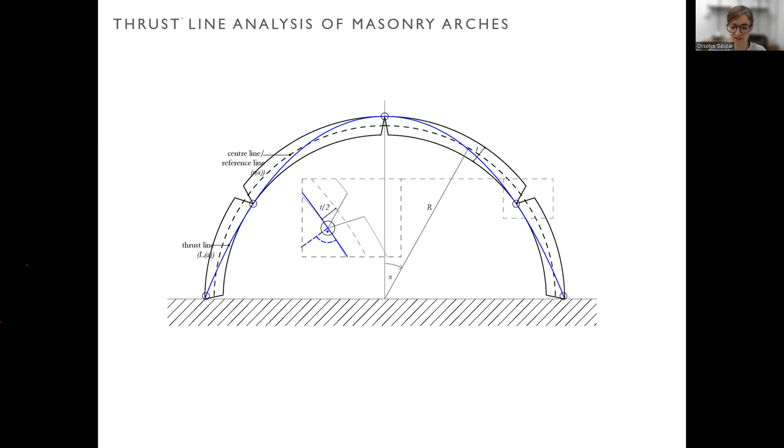But while the inverted chain has a catenary shape, we very rarely build arches in a catenary shape. It is not even necessary—the shape just has to be close enough to the catenary shape. Figuratively speaking, that means it has to contain a thrust line, like the blue line, within its boundaries. This defines how thin an arc can be, at least conceptually. The image you see here captures the limit. A thinner arc would fail instantly.

Sorry, jumped to—but a thinner arc would also use less material. Hence, finding a good shape was always important. This was also known to the master builders of the past, and it is often said that Gothic construction was especially daring, meaning those arches were very slender. I was interested in how close the builders got to the theoretical optimum.

I studied the pointed arc and determined its optimal shape, which is the shape that results in the thinnest possible arc for a given load case, in this case self-weight. And I proved that the form exists in an analytical way, which supported previous numerical studies.

Then I turned to a kind of data-driven approach, because I was interested—it's nice that we know what the optimal shape is, but how common was that in the past? So what I did is first look in the literature at what are the typical shapes of Gothic arches. There are some construction methods, and they always define an arc based on its eccentricity.

The eccentricity is basically, you see on the left, the black dots—the distance of these black dots from the center of symmetry of the arc. The bigger the eccentricity, the pointier the arc. So I collected data of various arches from English and French Gothic cathedrals, measured their eccentricity, and put them in a graph, as you can see.

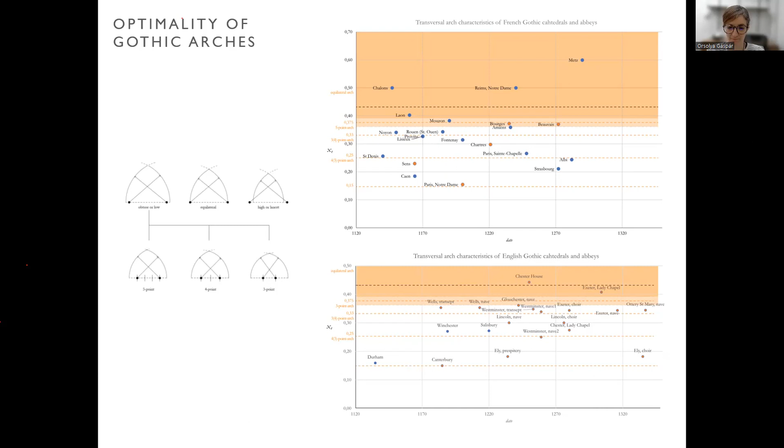Interestingly, not only the global geometry but also the shape of the voussoirs, essentially the bricks or stones that make an arc, affects how thin this arc can be. Moreover, these two features, global shape and voussoir shape, are interrelated. There have been studies on how different voussoir shapes affect the thickness of an arc, but no one looked specifically for the shape of voussoirs that would result in the thinnest possible arc.

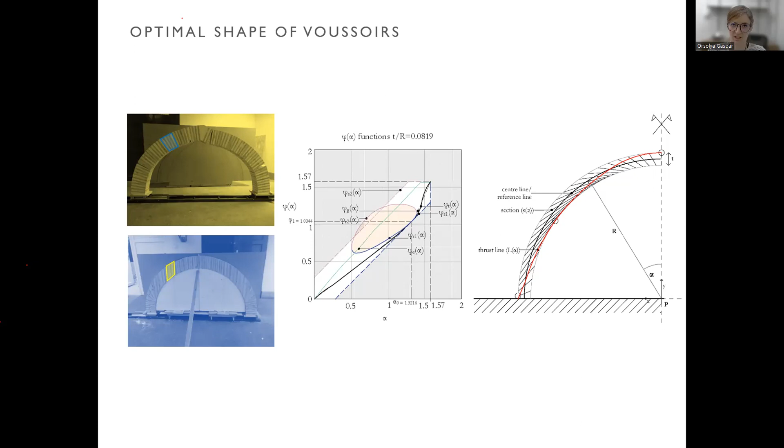So we also conducted some large-scale experiments to see how they work. And as expected, some of those experiments turned out to be rather thought experiments, because those arches do not stand. This highlights the importance of friction, which is usually not considered in thrust line analysis. But I found a way to incorporate friction in a geometrical way into the same framework I developed to find the optimal shape of voussoirs.

And again, those investigations have some interesting conclusions. One of them is that it explicitly tells us why a typical voussoir shape, which would be radial, as you can see on the top left yellow image, works almost for any arc. The reason is that for reasonable material qualities that masonry has, this shape is always above the limit of friction.

But there is another thing which is interesting. From this investigation, it turned out that for flat arches, these do not hold. It means that for flat arches, we would need to specifically design the shape of the voussoirs to avoid sliding.

And there is another thing which is not directly related to friction, but you can see from the image on the right, these curves, the red, the black, and the blue, are limiting curves of the thickness of an arc subject to their global shape. So from the left we go from a pointier one to a flatter one on the right. Observe that the highest values of these curves, meaning the biggest thickness, is almost at the same place where there is the semicircular arc.

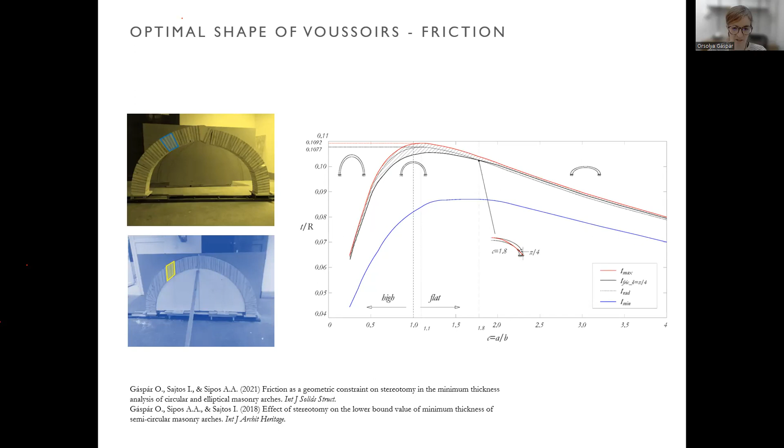So that's the background with which I arrived at the form finding lab, where the challenge is to find ways we can reduce or even eliminate the need for formwork and scaffolding. This is relevant because there are many studies on complex wall shapes, free form walls, and they usually require quite a lot of formwork.

So we studied various vernacular and historical methods. You can see a few listed on this image, from corbelling to Catalan vaulting, Nubian vaulting, cable staying, rib networks, and plate band, from which I'm focusing on the pitched brick technology.

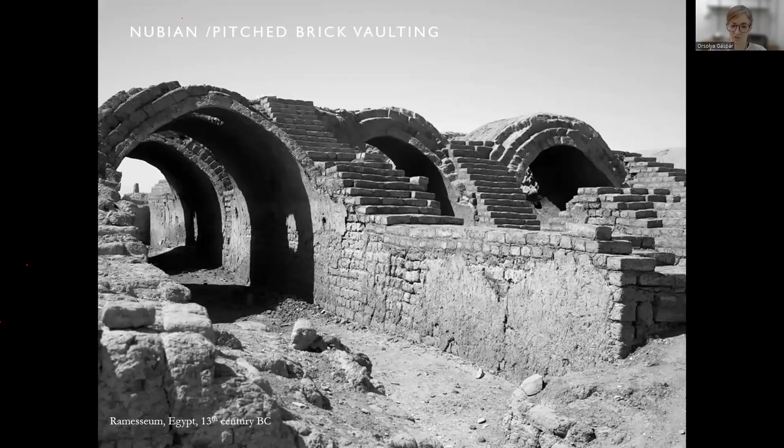This is a technique that likely originates from Egypt or the Middle East, and the previous image shows why it works without formwork. Essentially, it needs heavy back support. Usually it's a wall, and all the layers are laid a bit inclined, so they are always supported by the previous layer, which eventually lays on the wall.

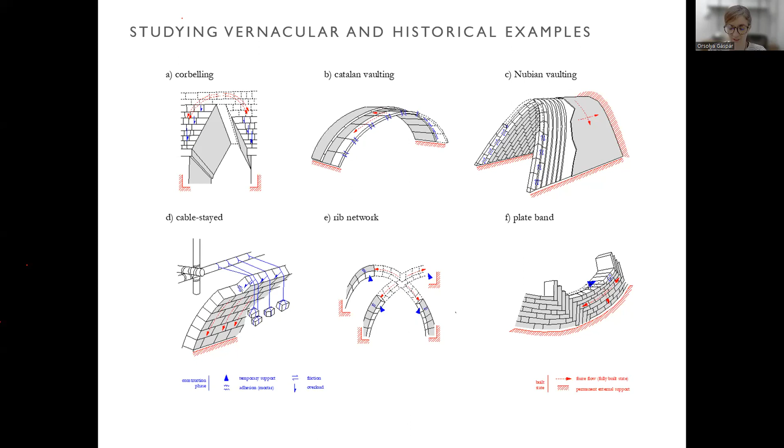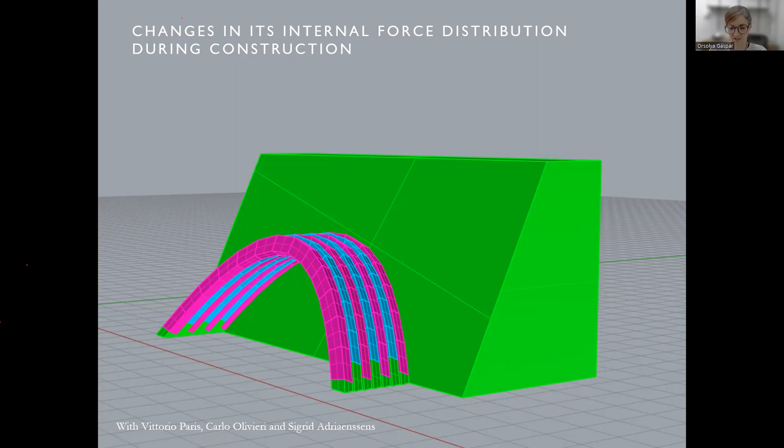Despite how ancient this technology is, we still know relatively little about how it works, especially how the forces are distributed during construction, which would be interesting if, for example, we would like to remove the wall from the end, or if we would like to find the ideal shape in terms of angle of inclination, global arc shape, etc. So this is the kind of research we are pursuing now.

Okay, and now let's start to talk about shells. And from all the shells, I will first tell you about the history of the Zeiss-Dywidag system. This was a very successful innovation in the pioneering period of reinforced concrete shells, and it had a long-lasting effect on both the technological and theoretical aspects of shell buildings.

The Zeiss-Dywidag domes were built all over Europe and even overseas before the Second World War, partly because this technology was sold along Zeiss's newly introduced projecting planetarium. The name Zeiss-Dywidag comes from two companies: Zeiss specializes in optical devices, and Dywidag is a construction company specializing in reinforced concrete construction.

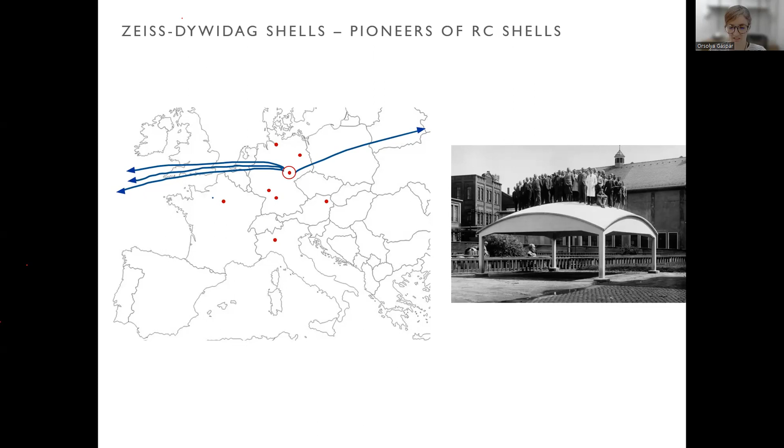The story started here in the middle with the red dot with the red circle around it, which is Jena, in Germany, and it started in 1922.

RC shells, reinforced concrete shells, are made of concrete plus reinforcement. Most commonly nowadays, formwork is laid, then reinforcement, and then concrete is poured over it. This was not obvious in the early days of shell history.

In a way, the history of reinforced concrete shells, at least in the Zeiss-Dywidag system, started out as grid shells, meaning that first, without any formwork, the self-bearing grid was constructed. This is essentially the reinforcement of a reinforced concrete shell. Then, when the grid was already made, they laid light formwork, and on that light formwork they sprayed the concrete.

This was true for the first two stages of development of the Zeiss-Dywidag system, and then they changed the whole way of construction and started to build shells as we do reinforced concrete construction today: making formwork first, then laying the reinforcement, then pouring concrete over it.

It was rather easy to explain why this last step was taken. There are two main reasons. One, the second method, the non-bearing grid, requires less precision. And the concrete layering can be a bit thinner, which, if we think about it with what we know about concrete construction today, is a bit absurd, because the thickness they were thinking about is really 3 centimeters versus 4 centimeters, which is extremely low for concrete construction. But back in the early days of shell construction, it was not unusual.

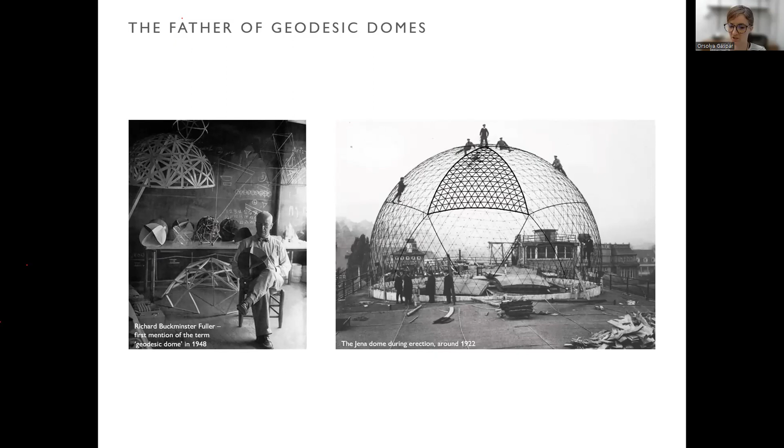If you know the term geodesic dome, most likely you associate it with Buckminster Fuller, who was a very famous innovator in the mid-century United States. He was the one who coined this term, actually, but he coined it in 1948, which is more than 25 years later than when the first dome was actually constructed. We do not have any information that he had any previous knowledge of this dome, so likely these two things happened completely independently from each other.

The interesting thing about the first geodesic dome is that the challenging thing was that there was not much info on this early example. It was rediscovered in the 1980s, and then various assumptions were made retrospectively about how it was constructed.

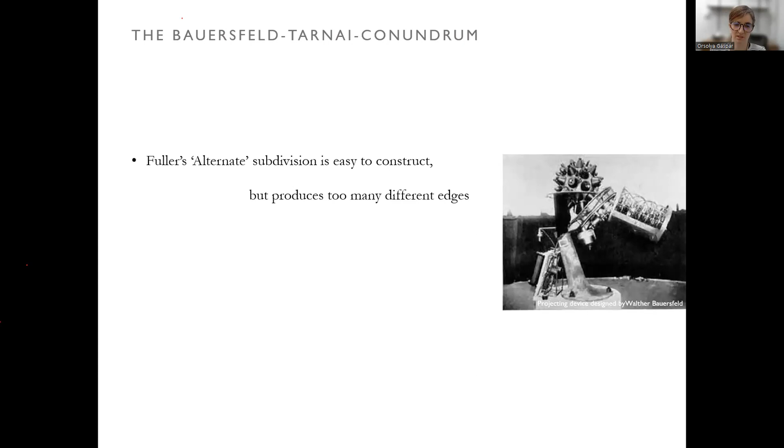A very popular belief was that the pattern of this dome was the same as the pattern of Fuller's alternate subdivision, which seems logical, as that is a very easy to construct pattern. But there were other researchers who know the work of Bauersfeld as an optical engineer, and as an optical engineer, he was very keen on optimization. The idea was that someone who went so far in optimization in optical devices would probably not settle for something that is easy to construct, but in a geometrical sense, as I will show you, performs rather poorly. This idea that the design must have been different than Fuller's comes from Professor Tibor Tarnai.

A brief outlook on what Bauersfeld did as an optical engineer. He was the inventor of the planetarium device, this thing you can see on the right.

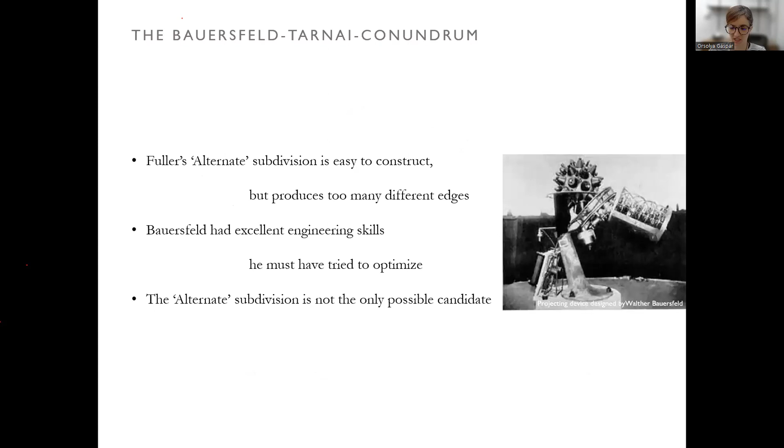He turned to building the dome because he needed a surface that was flat and uniform enough to try his projecting device. The projecting device also relies on a geodesic concept: the projectors are inserted on the surface of a truncated icosahedron, and he made sure each surface would fit the same inscribed circle.

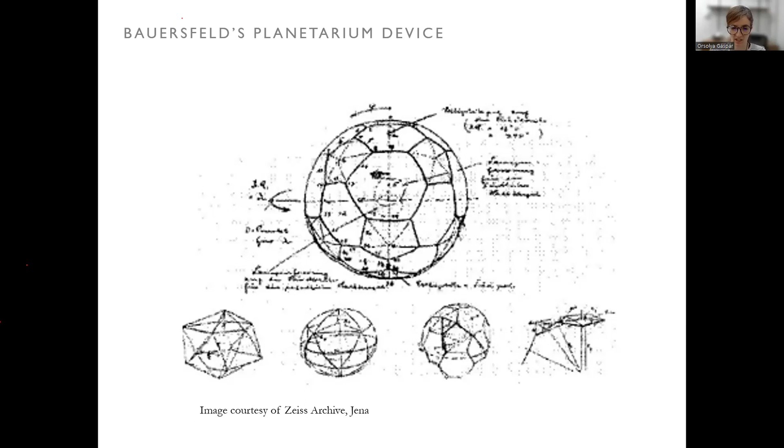So now we know why he designed the dome. We have also seen a couple of geodesic domes or geodesic patterns, but there are some characteristics that are important, and I will use these terms a lot in the upcoming slides, so let's clarify them.

First, a geodesic dome is usually created by having a regular polyhedron, typically an icosahedron, inscribed in a sphere and then projected onto the sphere. The subdivision of its faces either follows on the sphere, or is done on the plane and then the subdivided pattern is projected onto the surface. I will show examples for both methods.

It's again not something set in stone, but typically each curve on a geodesic dome lies on a great circle. A great circle on a sphere is a circle that has the same radius as the sphere. In contrast, there are small circles, like the latitudes on Earth, which have a smaller radius than the sphere itself.

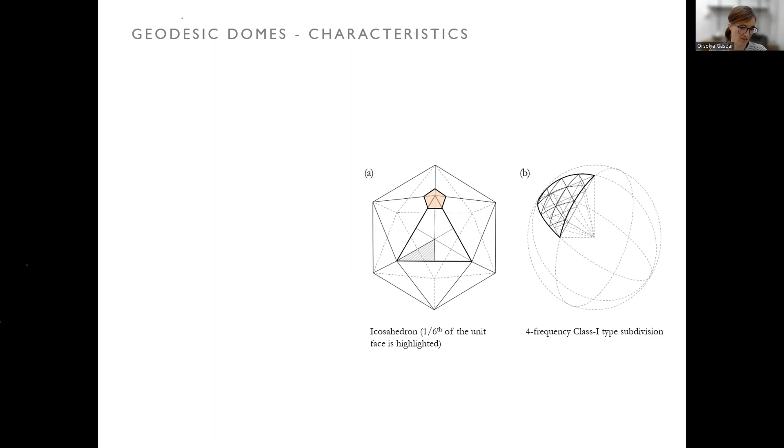There is also a classification of these patterns. What you see in this image is a class 1 type subdivision. I will shortly show you the other classes. Based on the terminology I've introduced, we can see from the very few images that survived of the first geodesic dome that it was also based on an icosahedron. It is a 16 frequency subdivision, and it is class 1 type.

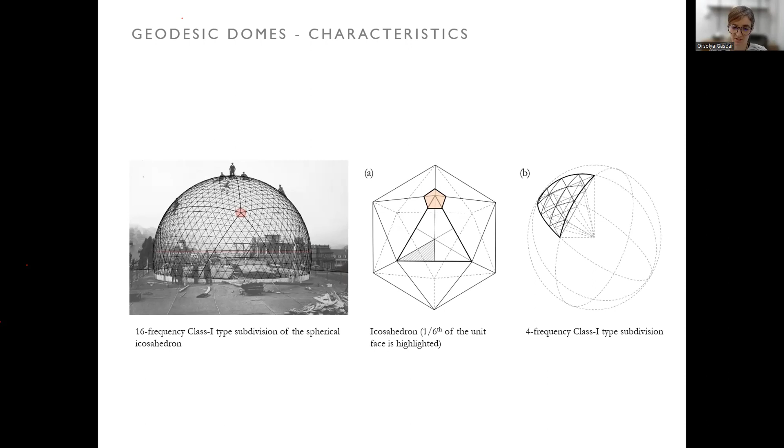What are the other classes? There is class 2 and class 3. The classification tells us if the pattern of the small triangles is rotated compared to the orientation of the original triangle, which is the face of the icosahedron. In class 1 type, it is not rotated, it has the same orientation.

Okay, so that's the way to construct a geodesic dome. But what defines a good geodesic dome? There is an aesthetic aspect: it needs to be smooth, which can be achieved with almost equilateral triangles. There are also construction and assembly aspects, which need as few different edges as possible for easier production.

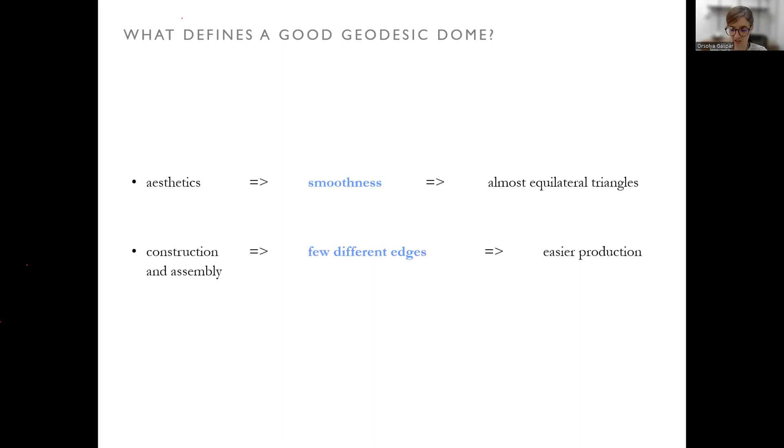Why is it so hard? Usually these two aspects are conflicting, meaning you can go for a very smooth pattern, but then you'll have a greater variation of edge lengths, or you can have very few edges, but then the pattern will not be so smooth.

There are, of course, not only regular solids like the platonic solids, but so-called semi-regular solids that share some properties of the regular solids but are more varied. One of them is the Archimedean solids, where the edge length is consistent, but there are multiple types of faces, always more than one. The dual of these solids, of which there are only 13, are the so-called Catalan solids, which have congruent faces, only one type of face, but then the edge lengths are varying.

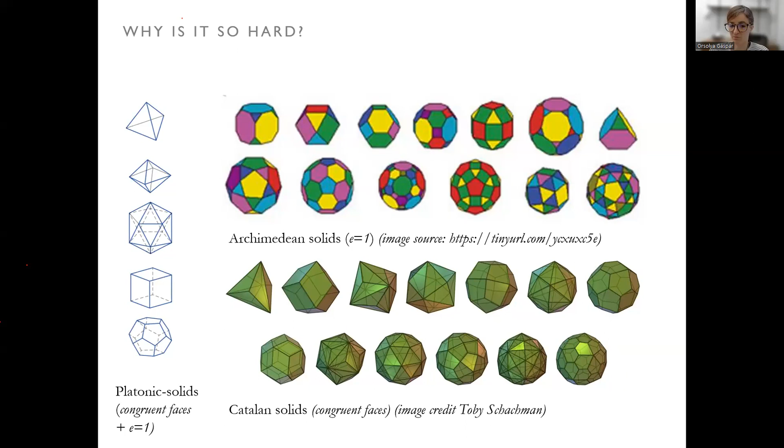So I think this is insightful as to why it's such a hard challenge to find a geodesic pattern that simultaneously fulfills both aspects of an ideal geodesic dome.

Let's see how Bauersfeld attempted to do this. First, he introduced a benchmarking parameter for smoothness, which he called the edge length ratio. This is the ratio of the longest versus the shortest edge.

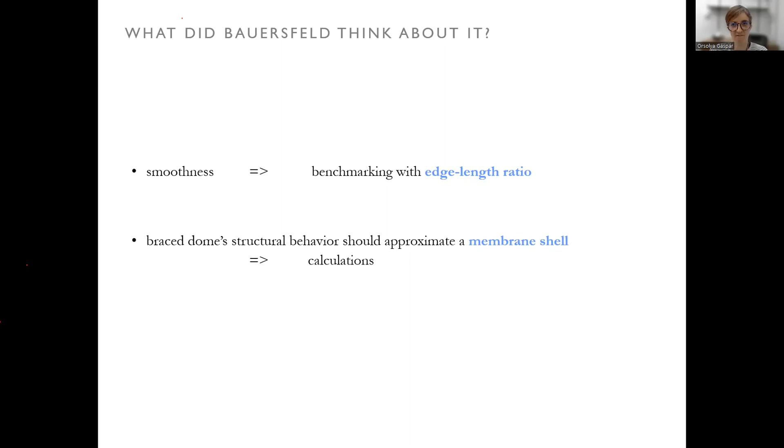He also aimed to have the braced dome's structural behavior approximated by a membrane shell, a continuous model for calculation purposes. For that, he wanted to have as regular triangles as possible. What these two added up in his mind was an equal area tessellation.

In his manuscript, which is the main resource for this research, there are three main benchmarking parameters he continuously used. One is the already mentioned edge length ratio, the ratio of the longest and shortest edge. Another is the number of different edges, which controls how many different edges are in the tessellation. And the so-called edge density, which is the perimeter, or half perimeter, of the triangle over the area.

While the first two benchmarking parameters are global parameters—so there is one number for the whole tessellation—edge density is actually local. I will talk about edge density only towards the end of this part of the talk, but it will be interesting to see how he used it.

One of the most exciting outcomes of this research was that we could prove that Bauersfeld was very much into optimization. As I mentioned, there were very few resources on his work. The reason for this was that there were only a couple of images that survived from this first geodesic dome.

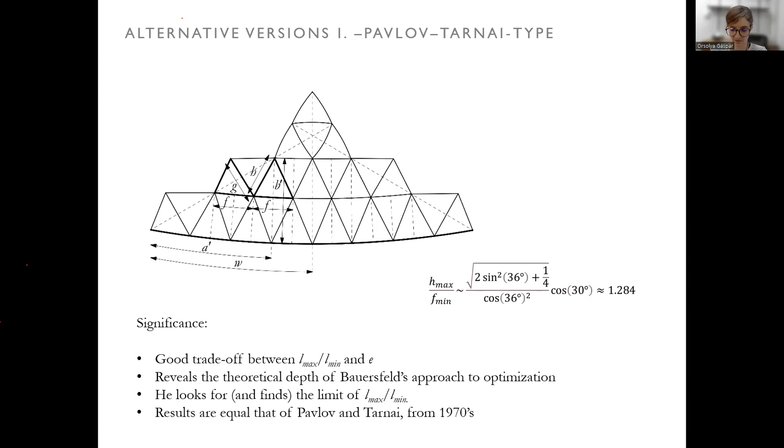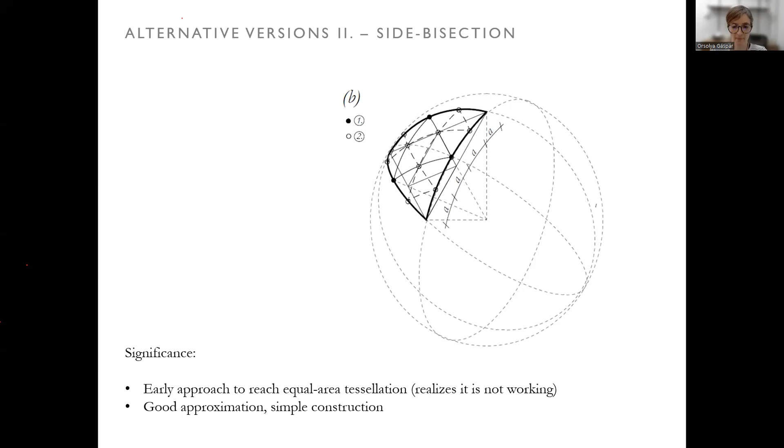Bauersfeld actually attempted to reach an equal area tessellation with this method, but he was not happy with the result, although it's not very far from an equal area tessellation. It also has relatively few edges - debatable, but not that many at least - and it has a very good edge length ratio. But neither was the one that he was actually settling on.

I considered myself super lucky when going through this manuscript, as an insert kind of fell out. In that insert, I find a very detailed calculation of a pattern that at first I had no idea what it was, but it seemed very promising. It also contained a lot of calculations. And while I already told you that Bauersfeld's aim was to find an equal area tessellation, this was not obvious at first. No one told me that it was so.

So when I saw the calculations, I had no idea what I was seeing. But after a while, it became obvious by re-engineering the calculations that he was actually developing an algorithm that would lead to an equal area tessellation of the geodesic surface. It is not, again, a perfect match, so it will not result in equal area triangles 100%, but it is a very good algorithm to almost get there.

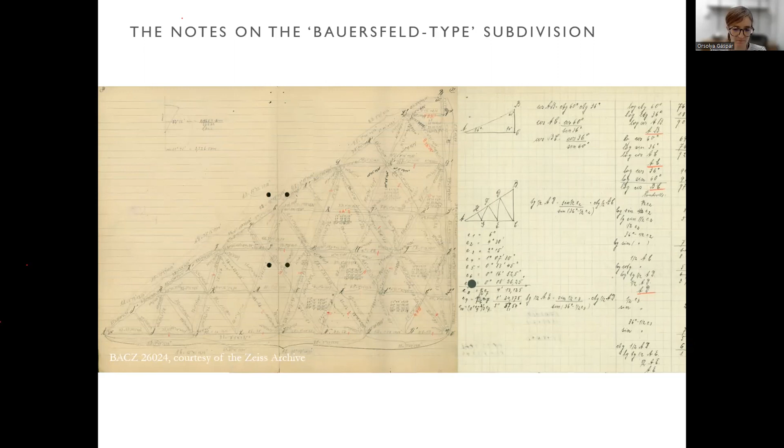The algorithm works as follows. Again, what you see on the image is not 1/3, but 1/6 of the face of the icosahedron. Remember that the face of the icosahedron is a regular triangle, so 1/6 of it actually represents the whole triangle because of its symmetries. First, he divides this triangle in the area ratio 1:3, and then with every subsequent step, he halves the area. These steps are marked in black here.

This was a very interesting result. It could be understood, as I said, by the calculation. He used the so-called L'Huilier formula to calculate the area of a spherical triangle, which is calculated as the spherical excess. It means that the internal angles of a spherical triangle do not add up to 180 degrees - they are always more - and how much more actually means the area of these triangles.

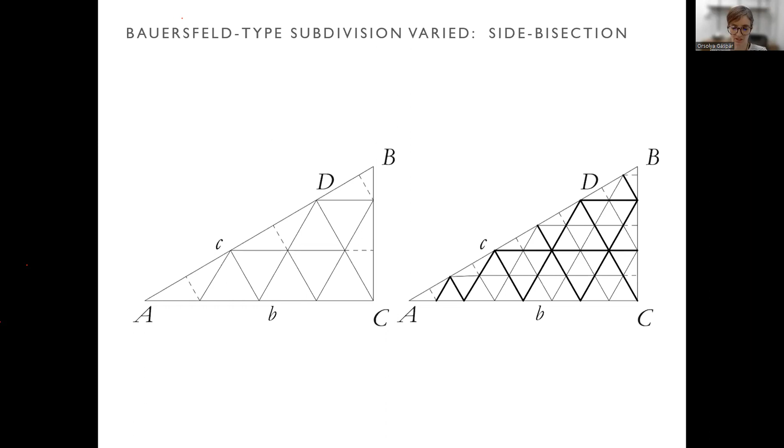If we would use a computational approach, and if we could get the triangles to be close to equal area within 1%, that is already considered a very good result.

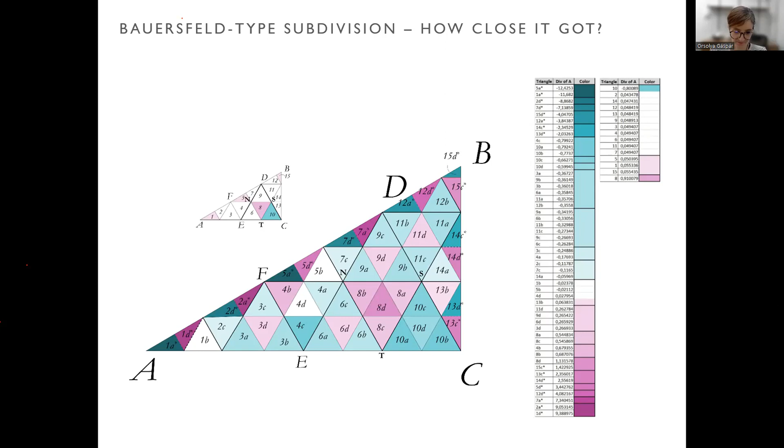Okay, so let's compare and contrast. The Bauersfeld type subdivision is the equal area subdivision, as I have shown you, with the last step having side-bisection, and not the method that he originally started to use.

We also calculated the geometrical data for an unmodified logic, so if he were to continue with the same algorithm. As a comparison, we included the side-bisection and Fuller's icosahedral subdivision, because that was originally assumed for this subdivision.

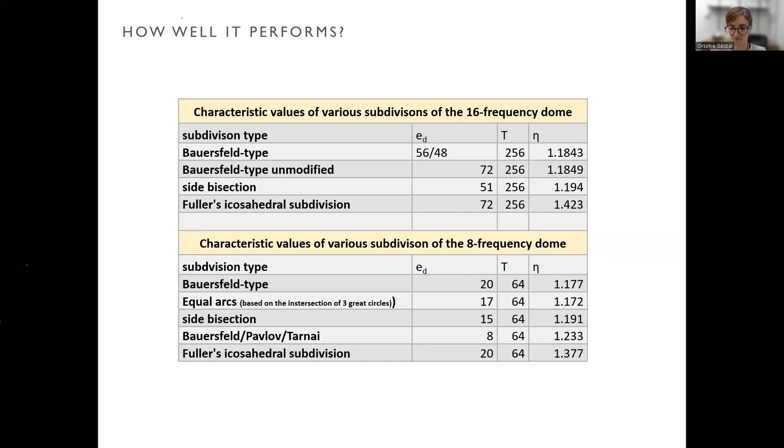The only problem was that it was a fantastic result. I was super excited, but there was no indication on the documents that this was actually the one that was built. So we did virtual reconstruction of various patterns and then compared it to the existing photographs to have another proof of concept and try to support whether it could have been built like that or not.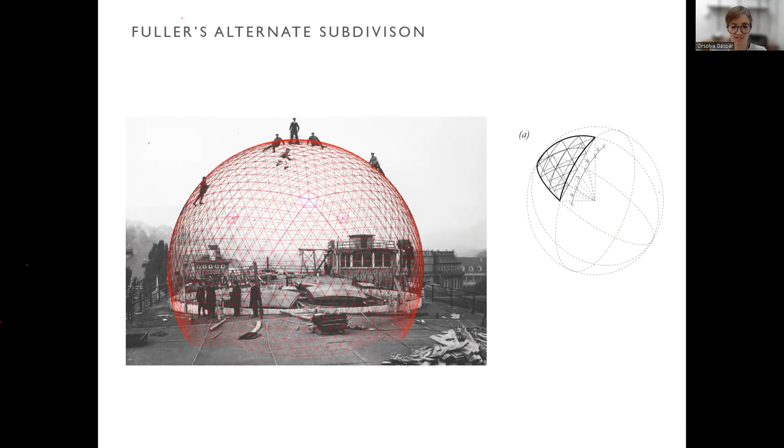So let's see how various subdivisions perform. This is Fuller's alternate, so the one that was thought it was. As you can see, it is not a particularly good match. Side bisection is already more promising, so the red overlay is almost matching the one underneath.

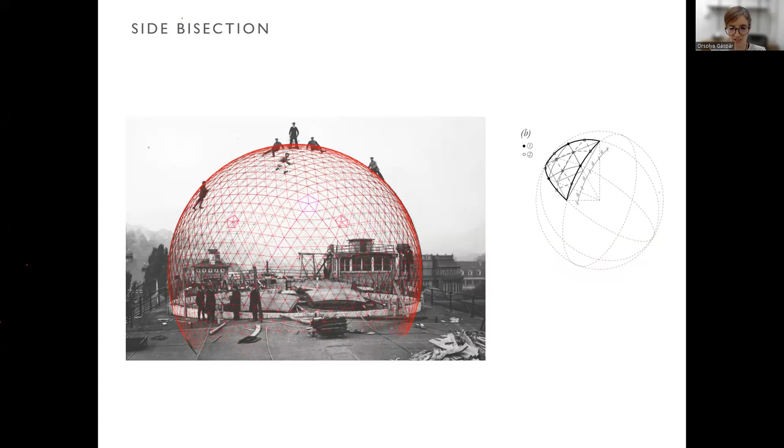And this is Bauersfeld's, the one that I call Bauersfeld type subdivision, and I think with some reason, because this by far matches the historical images the best.

Okay, so I spent the previous part of the presentation to convince you that this geodesic pattern is awesome, and it really is - in geometrical terms, it performs very well. So it was super interesting to see that after this, only this first dome was constructed, the method was left.

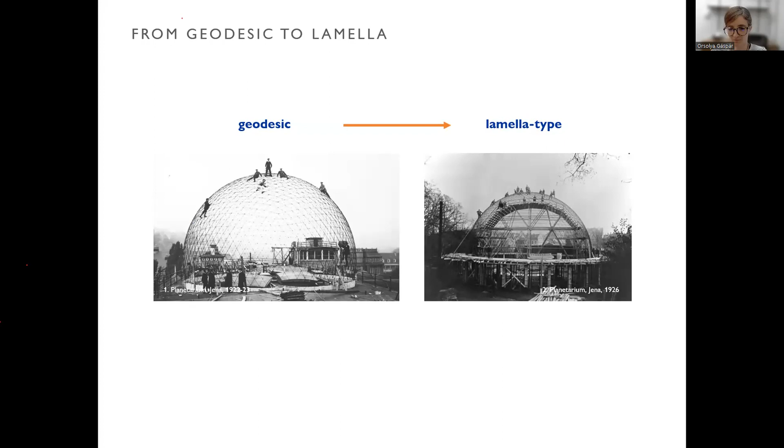For the tessellation, another kind of pattern was chosen, the so-called Lamella type dome. The difference between the two is that the geodesic is based on a regular polyhedron, which is projected onto the surface, whereas a Lamella type dome essentially uses small circles as latitudes on Earth, and then isosceles triangles are constructed within these small circles when the pattern is finalized.

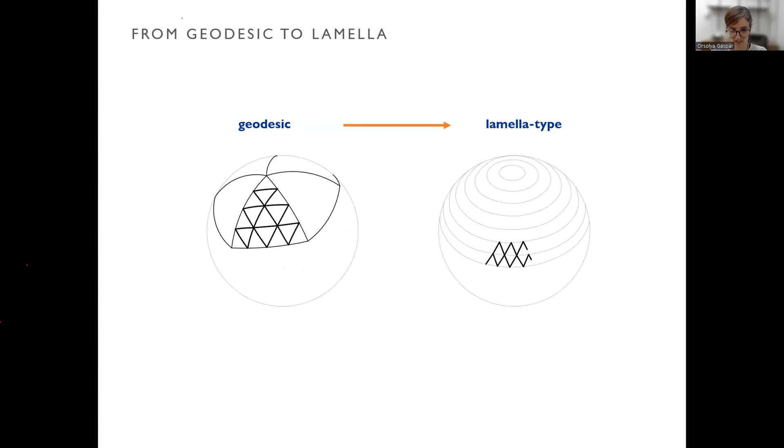What could have been the reasons for this change? One reason was that the later domes were significantly larger than the original dome, which was only built for demonstrative purposes. The original dome was 16 meters in span. The second dome that they built was actually 40 meters in span.

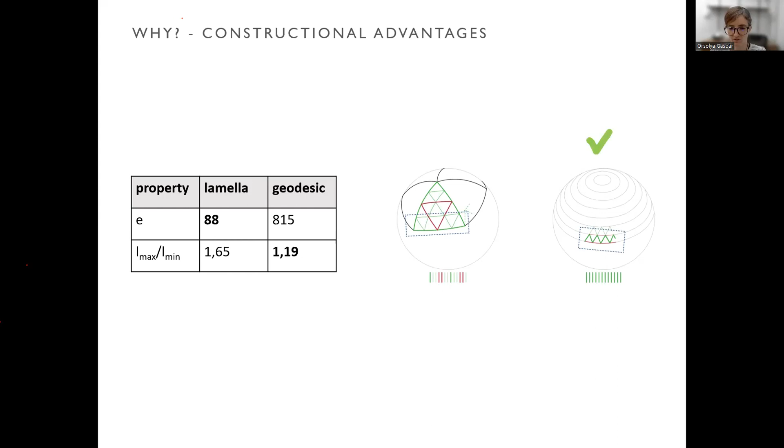So that's one reason, because a bigger dome requires a different construction technology. The original dome was constructed from top to bottom with the help of a crane. The later domes were not surprisingly constructed from bottom to top without the use of a crane because of their size.

So that could be one reason, but there is one that is more important, I think. If you look at these images, what they try to show you is the patterning as you would lay them if you were on the work site. For a geodesic dome, you will have to vary at least 1, 2, 3 or more types of edges in one row. Whereas for a Lamella type, you would use the exact same type of element in one row, and you don't have to think which one comes next.

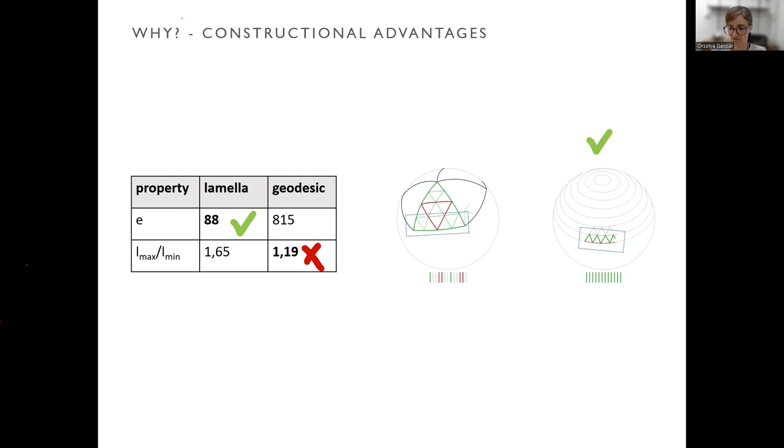That's one thing. Then there are other properties. Of course, there is the edge length ratio, but from constructional purposes, it is really irrelevant. But the different number of different edges, which is marked with E, is important. For a Lamella type of dome, for the size of the later domes, approximately 40 meters, there are 88 different edges. In a geodesic pattern of the same size, there would be 800, so a lot more different edges, which from a constructional point is not good.

However, the geometry of the geodesic pattern is really nice. The question is if the Lamella type could match it. First, we learned that the Lamella type was also based on the idea of trying to create equal areas. So we checked how far Bauersfeld got with that.

He wanted to have relatively regular triangles because he wanted to calculate the behavior of the shell based on a continuum model. And for that, he would need regular triangles, to have a good match between the two models, discrete and continuous.

And again, he used some benchmarking parameters. In this case, he used, to some extent, edge-length ratio, not so much. Rather, he resorted to the number of different edges and the edge density. Again, that's a local parameter and is the ratio of the half perimeter over the area.

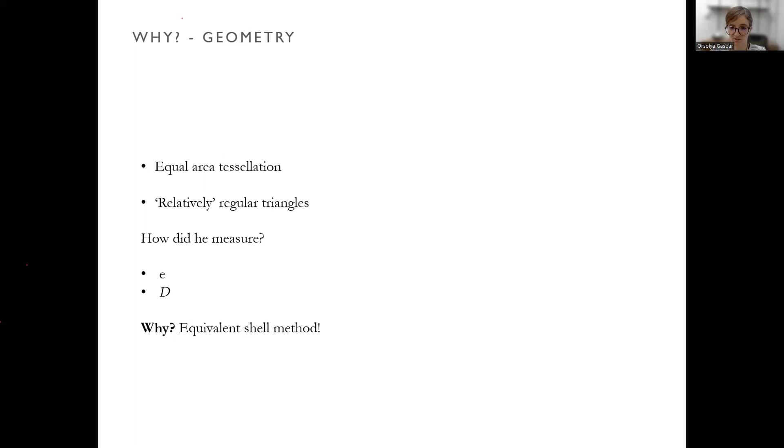I told you that he wanted to calculate the behavior of the shell using a continuum method, and it has a name. It's called the equivalent shell method. The concept is, as Bauersfeld used it, what would be the equivalent continuum of a regular grid of bars, that is, a triangulated grid made of regular triangles. So what would be the equivalent continuum that would have the same deformations? His model was a planar one, so he imagined two planes loaded in their own plane.

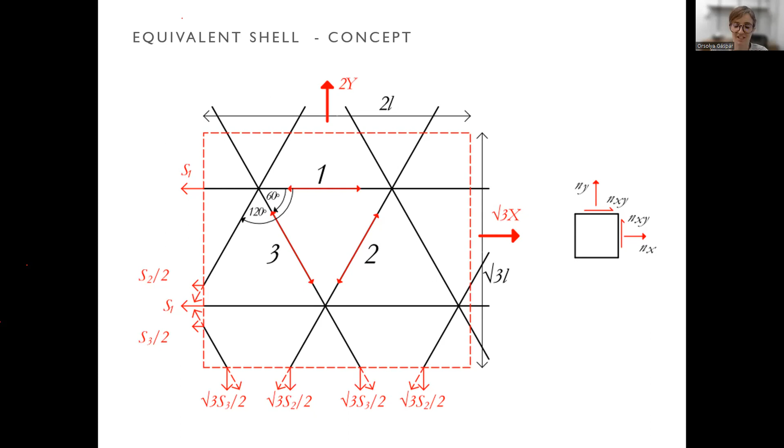And what would be the properties of these two that would result in similar behavior? Why was it used? The calculation of bar forces is actually possible in a triangulated grid using the equivalent continuum as a base, based on statics essentially. So for that, you would not need to worry about the deformations because the problem is statically determinate.

But the deformations are relevant if you want to use it for buckling analysis. And actually, this is what Bauersfeld intended to use. He wanted to use the continuum method to check if the shell were prone to buckling. The grid shell was prone to buckling. And for that, he needed the assumption of equal deformations. Not only the assumption, he needed to make sure that the deformations were actually equal.

The equivalent shell method or model has a rich literature. It started in the 19th century with a very basic model. I will shortly talk about it. But there was an inverse problem that was investigated around the time of Bauersfeld, called the truss framework method. This was an approach to calculate stresses and strains in a continuum based on the discretization of this problem. This was essentially an early numerical approach.

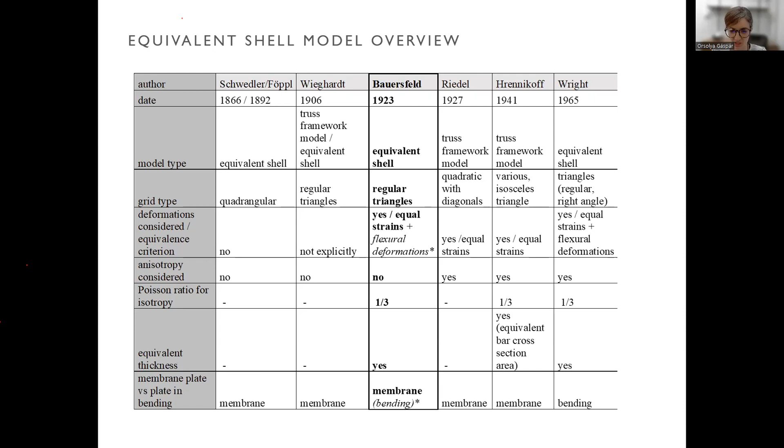The equivalent shell theory, as Bauersfeld used it, so using a continuum to calculate buckling or bar forces in a grid shell, became heavily researched in the 1950s. There is a seminal paper from Wright, but that was in 1965, and in terms of content it's comparable to what Bauersfeld discovered in 1923. Again, he was a mechanical engineer in an optical firm. This was a side project for him, but his contribution was only matched about 40 years later, which is, I think, kind of exciting.

The first dome that he designed with this lamella pattern is the so-called Schott dome. It is also in Jena, where the first dome was built. This is not a coincidence. The headquarters of the Zeiss company is in Jena, and Schott is the neighboring company, and the two companies collaborated a lot. For this company, he designed a large dome with 40 meters span, using a lamella type of tessellation.

The lamella type of tessellation has a unique challenge: normally, as you approach from the border to the middle, the triangles become more and more distorted because there is less and less space. What Bauersfeld did is develop a scheme to reduce the number of triangles subsequently from the edge of the sphere to the middle of it.

This was again re-engineered from his original drawings that you could see in the last image. From the calculations, we could determine what kind of constraints he used in terms of the shape of the triangles, so what were the limits he allowed in terms of distortion within the same range.

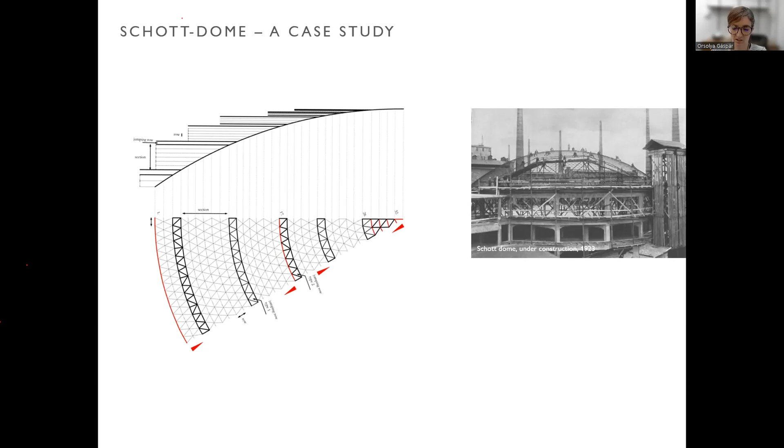But how close? First we will focus on the global parameters - kind of what were the ratios of the largest and smallest area, edge length ratios, number of triangles, and so on. And then I will talk a little bit about local parameters.

What are the subdivisions, the tessellation types compared here? There are geodesic patterns and lamella type patterns. The geodesic patterns here are made up - he never made a design for a geodesic pattern of this size, but we tried to fit one as close as possible, with the logic of having the same amount of triangles around the edge of the sphere. For the lamella type, there are two: one based on this equal height concept I briefly introduced before, and the second one based on equal internal angle, which is something you would do, I think, if tasked to design a dome - it seems logical to have each row have the same internal angle.

Let's see first how the ratio of the largest and smallest area works in different patterns. For his design for the lamella dome, the ratio is 1.6. For geodesic patterns, we tried two: one based on the full area design and one based on the side bisection design. One performs significantly better - side bisection results in a much more even distribution of triangle areas, but the full area design is way worse. Interestingly, the simpler lamella design to construct, the one with equal internal angles, has actually a pretty similar ratio in terms of maximum and minimal areas.

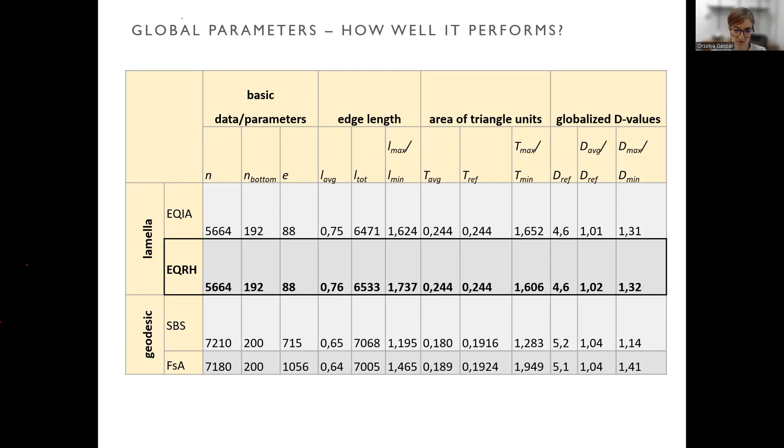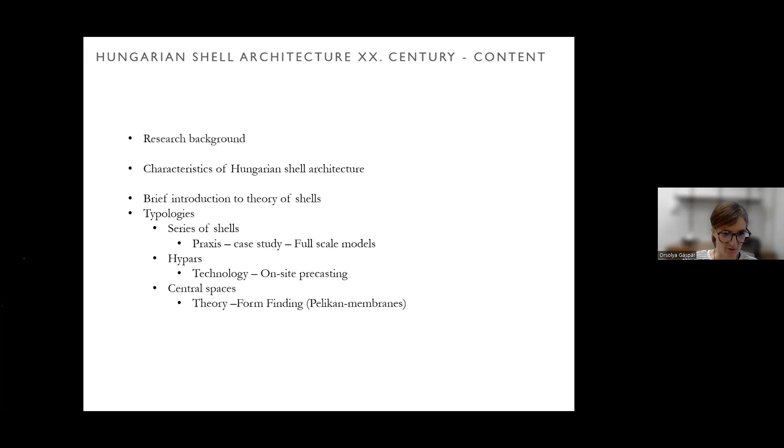Before all of that, I will give you a short glimpse into the background of this research.

So the developments of Hungarian shell architecture are interesting from the point of view of knowledge transfer, because despite the name of the Iron Curtain, knowledge transfer was possible and was practiced through the curtain as well, in both directions. Of course, not with the same intensity, but it still did happen.

When we started this research, the aim was to document Hungarian shells, because they are a huge part of our heritage of industrial construction, but they are also a huge amount of concrete. That's important because if these structures, which are reaching the end of their life cycle, are demolished, they will create a large amount of rubble. And they are very likely to be demolished unless public awareness of their value becomes the norm.

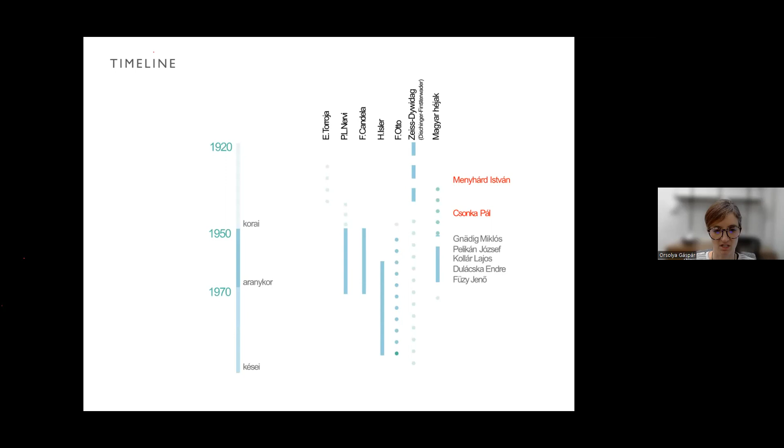And this is a structure that was actually built by Nervi. The buildings are put here based on when they were constructed. And if we now look at the timeline filled with Hungarian examples, you can see a very big empty space here. This is the period after World War II when shells were not built in Hungary.

crown jewel of pre-World War Hungarian shell architecture, but it was never completed. The scaffolding was already there, the formwork was already done, but then the war came, and actually the scaffolding and the formwork were all used for other construction purposes and also to some extent for heating during the war. And it is still in this state today. So it was kind of never finished. In a way, it kind of reflects the story of Hungarian shell architecture in one particular example.

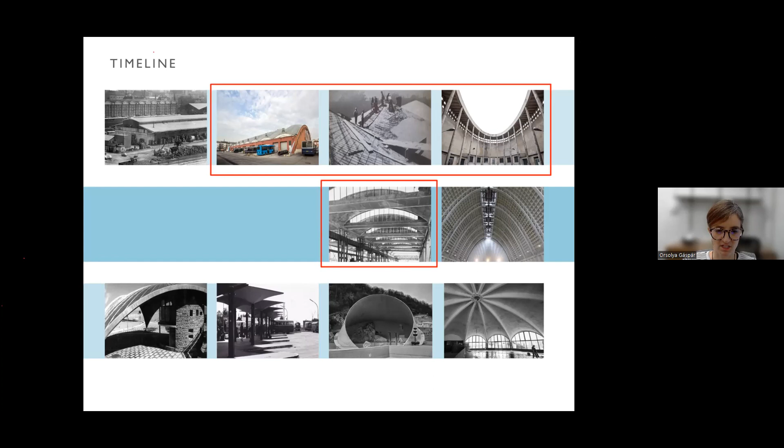Okay, with the red, I highlighted some structures that were designed by the same person. This is István Menyhárd. The name is not very important, but it is important that also in Hungary, there was one figure who was very influential and who had a long-lasting effect on shell design. This was very typical in the pioneering period of shells, not only in Hungary, but also in other parts of the world.

I promised a short intro to shells. I just want to classify structural models and geometry very briefly. For structural models, when we talk about shells, and these are continuous shells, we usually differentiate between three different types, from the very specific to the more general.

We have shear-free membrane on the top. As you can see from the arrows, shear-free membrane is a membrane that only has normal forces in it, or normal stresses, so no in-plane shear either. This is a very unique state. It's not very typical. Where you can kind of experience it in real life is more in tensile structures. They are typically modeled as shear-free membranes. But it can also be applied to reinforced concrete shells if the form is defined accordingly.

Then there are membrane shells, which means we have normal forces and also in-plane shear forces. And the most general case is shells in bending, when we have normal stresses, shear stresses, and also bending moments.

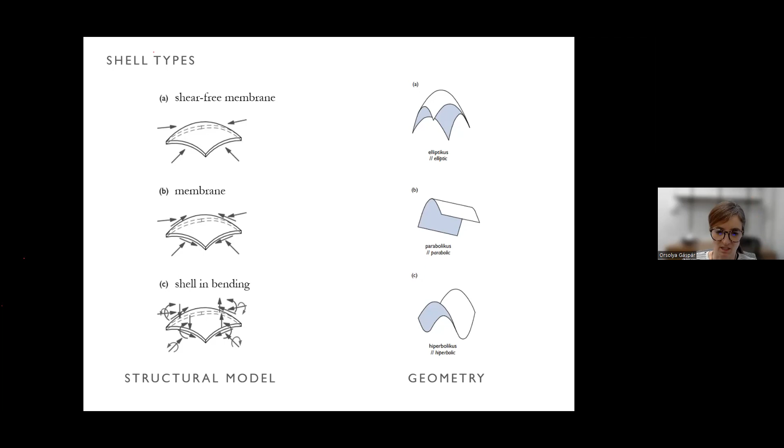Okay, so now we will see some examples. First, some examples when there was a big roof structure made up of a series of shells.

The first example is from the pre-war era, from the designer I mentioned, István Menyhárd. This is the bus garage. It's a typical application of shells, a building for infrastructure, which requires much bigger spans than were used before. This structure is exciting because it has a 90-meter span in the lateral direction.

The shells are elliptic - I mean each slice is elliptic. This 90-meter span was quite large. It was spanned with a 6-centimeter thick shell, which is extremely light. This was the biggest span built at that time anywhere in the world with this kind of structure.

It was only paralleled in 1952 by the Marignane hangars, which were designed by Nicolas Esquillan and Auguste Perret.

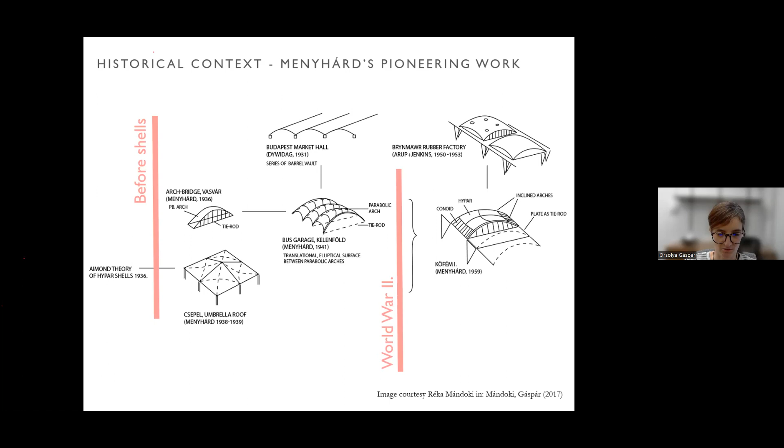This is the structure built in 1957, the first ever after World War II. The construction technology is very inventive - it relies on a sliding formwork, and for sliding the framework they used overhead cranes that were actually later used in the factory. So they kind of exploited a technology that was already there to make the formwork as efficient as possible.

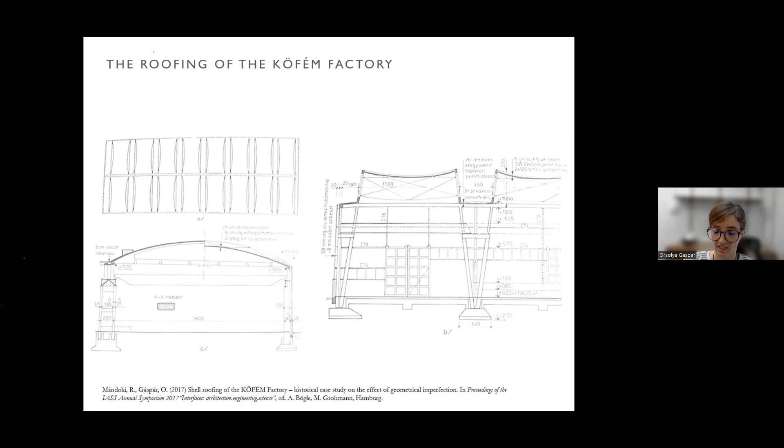The shape of this roof is very interesting. It is a saddle shape. As you can see, between two girders, there are these saddles. And these saddles on the sides, on the shorter sides, are connected to conoids, because along the edges they wanted a horizontal line to finish the design and did not want to see the edge of the saddle. But this is a challenge, because normally you would have to support a saddle shell with edge beams all over the perimeter.

A typical saddle would also exert normal stresses in all directions. But if you choose the dimensions of the shell right—for example, the ratio of the longer to the shorter side is 1 to 2, as was the case here—then for certain load cases, and the design load case here was a uniform vertical distributed load, as you can see from this image, the shell could be supported by edge girders along the long edges.

It would only have normal stresses exit on the short edges. So only these normal stresses would load the conoids adjoining them, and that's actually a load case that the conoid is very happy with. So this was a very creative concept on how to solve an architectural problem, but also how to make it suitable for a very specific shell geometry. This was such a success in terms of efficiency that it generated a large number of shells for industrial application, all related to this original concept.

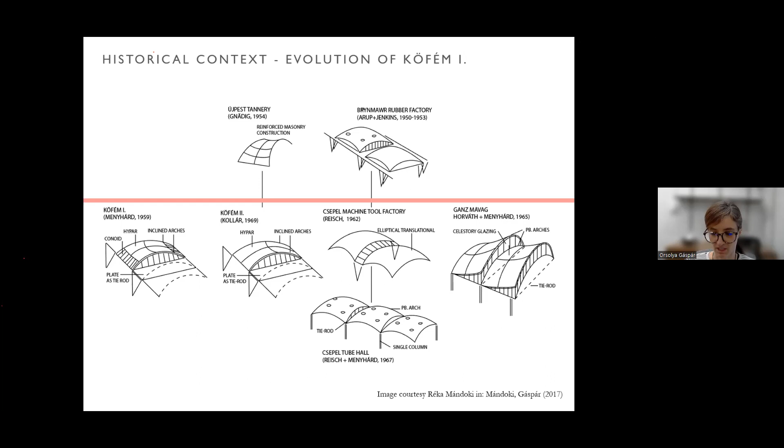This is an early successor of the saddle shape. This is also a saddle. They tried to combine it with some skylights in a unique way. This is one example of the same concept—same constructional concept—but with an elliptical shell design.

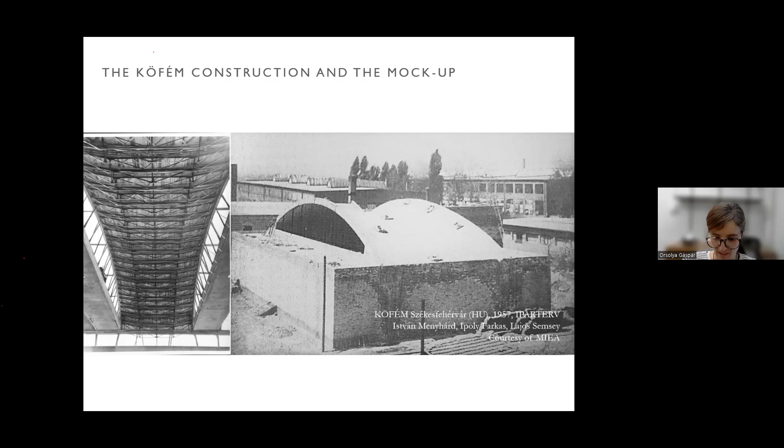I said that here we will focus on Praxis. Since this was the first shell built after World War II, the client wanted to make sure it was actually doable. So in addition to the calculation, he also ordered a full-scale model to be built on site. It was done, but there were multiple problems. First, the contractor was pretty inexperienced, as you could imagine, for the reasons why. It was also done in the winter, so it was very cold, which is not an ideal condition for concreting.

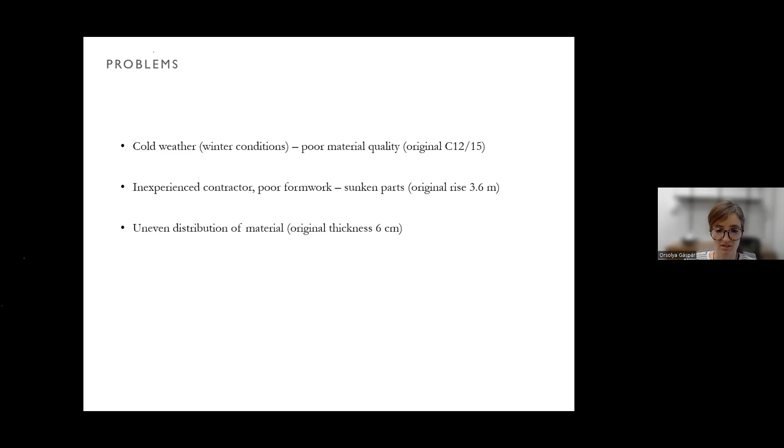The inexperience of the contractor led to two things. The material quality was not controlled well enough, so poorer material was used than was designed. The formwork was also not done according to standards, so some parts of it sank during construction, which led to uneven distribution of material. The original thickness was already very small, 6 centimeters, but in some places it became even less.

And eventually this mock-up, this full-scale model, failed. There was a huge investigation to figure out whether it was an engineering or a constructional defect. And while it concluded that it was a constructional defect, the reasons were never truly clarified.

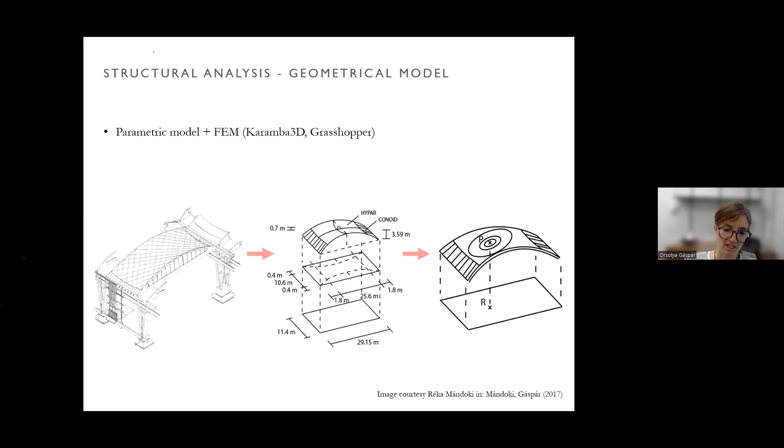It was an interesting project for a master thesis, where the student recommended building a parametric model to investigate different load cases and check which was the most dangerous for this shell—whether the poor material quality, the uneven distribution of stresses, or the change of the original geometry was the fatal factor.

The conclusion, which was kind of surprising to us, is that the shell could take almost everything. It could take a different geometry—it could still stand with a different geometry. It could still stand if the thickness was uneven, but it could not stand if the material was worse than it was designed for.

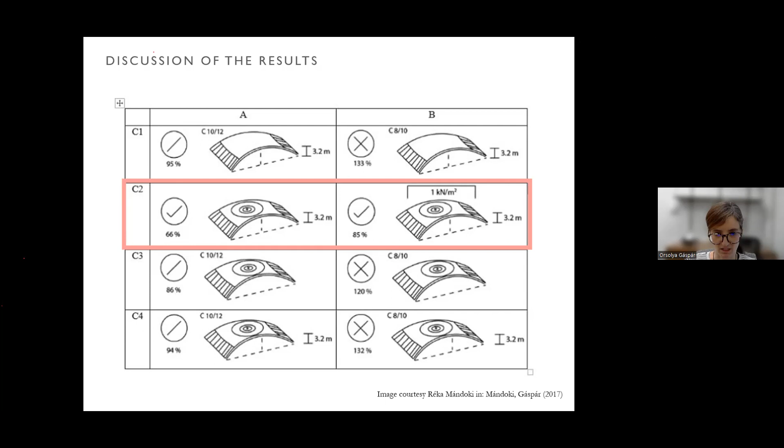Now we move over to hypars. The shift will not be very drastic because the last example we discussed is already a hypar shape, the saddle shell. But we jump back in time to 1938.

The date is interesting because the first study on hypar shells, a paper, was done in 1936, two years before, by a French engineer, Fernand Aimond. He was the first to clarify the behavior of hypar shells.

After two years, the engineer István Menyhárd built such shells in Hungary based only on those studies. These were among the first in the world built with this hypar shape. There were two others: one in Italy at the same time, by Giorgio Baroni, and of course Fernand Aimond also built hypars in France, but these were very early examples.

After World War II, the hypar was also a popular form not only in Hungary but everywhere else in the world. You can think of Felix Candela, for example, who was very famous for his hypars.

In Hungary, many hypars were built to serve as support infrastructure. Bus stations and train stations were often covered with hypar shells. These designs were standardized, and they were a good field to test prefabrication methods, specifically on-site precasting.

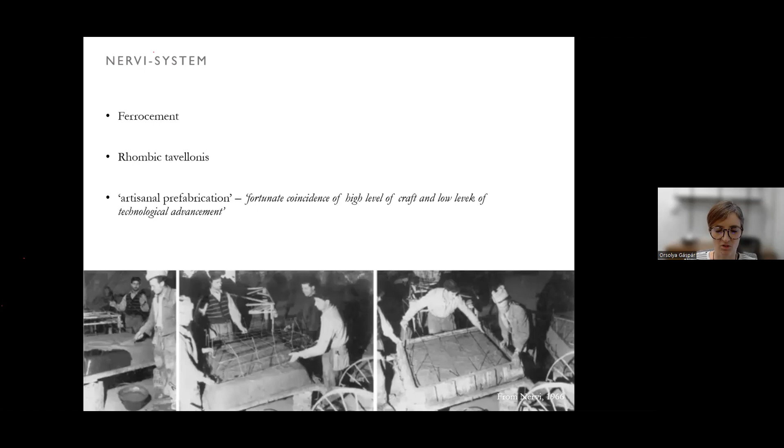So it is interesting to compare how similar methods were used in Hungary. First, there is a very direct comparison between Nervi's rhombic tavelloni and a project in Budapest designed in the 1960s. Nervi was also a contractor, so he was very conscious about efficiency and economy.

He used prefabrication not only to save on steel, but also to save on formwork. He developed this technology, as you can see on the red image on top, which necessitated only a sparse formwork - a great way to save timber.

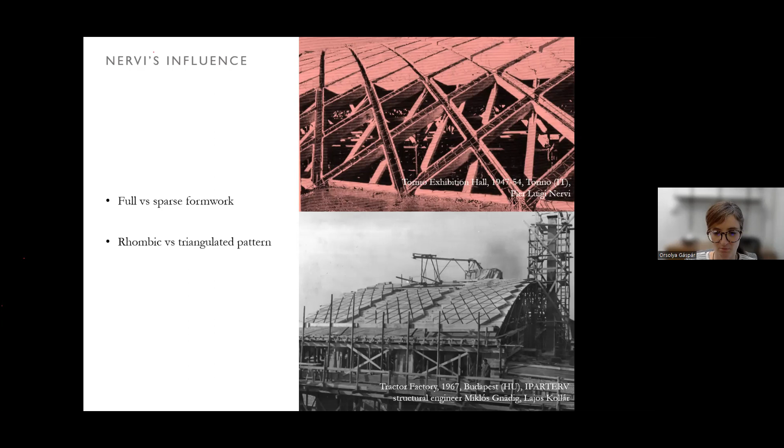It is interesting to see the image on the bottom, which is in Budapest. As you can see, there is a similar system of prefabricated panels already on the location they are supposed to be, but they are supported by a full formwork. So this potential was not exploited there.

To be honest, this small-scale prefabrication was not really typical in Hungary. Instead, what was done is large-scale prefabrication. Whole panels of these hypar shells were prefabricated on the ground and then lifted to the spot by cranes.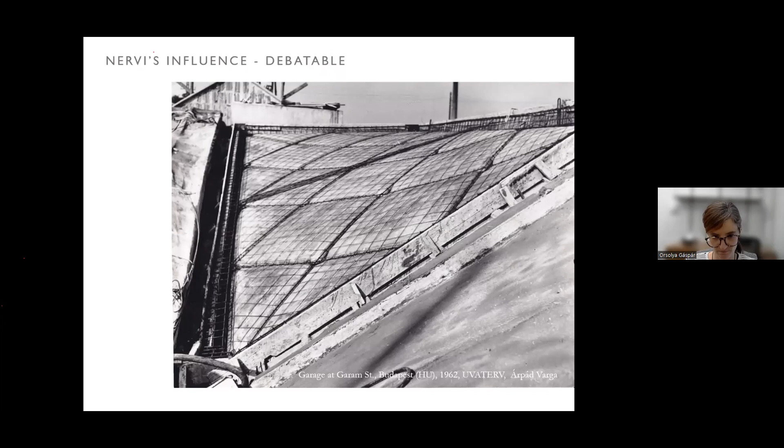And our final chapter is on the roofing of central spaces. This is the example I already told you about in one of the introductory slides. It was supposed to be a church. It is the unfinished church to this day.

It would have had an ellipse-based elliptical roofing, something in the manner of this one, but this is a much smaller scale, a less illustrious space. But this was finished by an engineer who was very much familiar with the original design for another church.

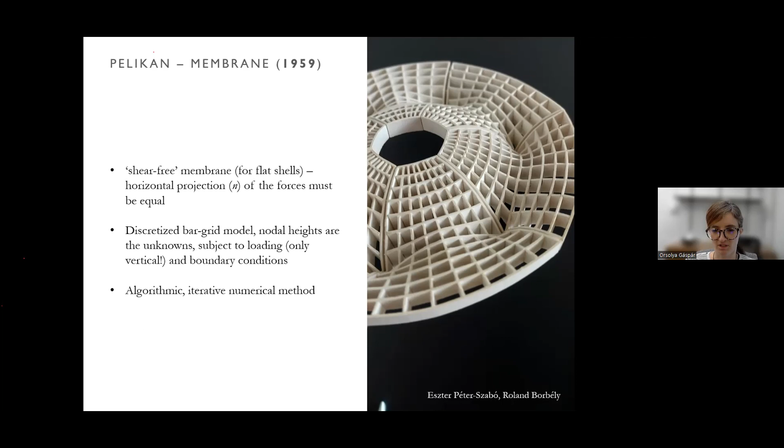There are many shapes that have been generated with this method. In theory, it is kind of similar to, or has similarities with, the thrust network analysis, but it was used to generate reinforced concrete shells.

It has a very advanced theory, but it was rarely applied to built structures. One of the few examples is the Keramion, which is in Germany. It was designed by Neufert and Polonyi in 1971. There was also an exhibition hall from the beginning of the 1960s that we know of.

The reason I wanted to include it so much in this presentation is that we know shells based on Pelikan's methods were designed in China, but we know nothing about whether they still stand or where they stand. It would be super interesting to me if any of you might have any information on that. I don't know if that's possible, but let's see.

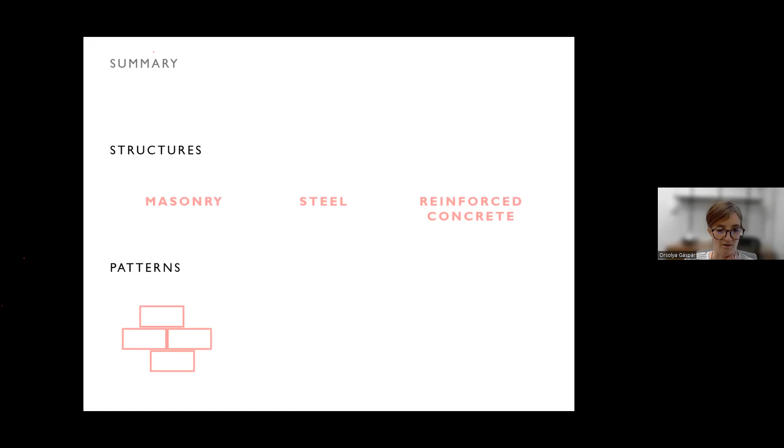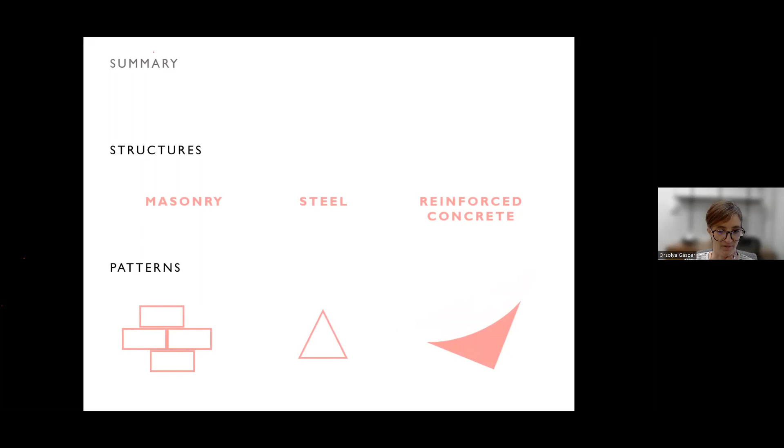So let's summarize. I have shown you different structures made of masonry, made of steel, and reinforced concrete. The patterns of these structures were always very closely related to how they performed in a structural sense. The patterns, on the micro scale, on the mesoscale, and also in the largest possible scale, are relevant, and they are influencing the ways structures work.

This kind of explains why I chose the title Structures and Patterns. And with that note, I would like to thank you for your kind attention, and I'm happy to answer any questions that you might have.

Great, thank you, thank you so much. We have some students here. One question is coming in the notes, can you see it? Orsolya? Sorry, can you see the question? We have some, yes I see one. Just give me one second. Can you ask a question by yourself, Carrie? Hi. Yes, can you see my question in the chat box? Yes, I can see your question, I'm just reading it.

Okay, so I'm happy to read that you are a student of architecture. I also have architecture as my background, so that's common ground.

Well, I think, which is about digital tools. The question is about, can you indicate some possible research direction for the shell structure by digital tools?